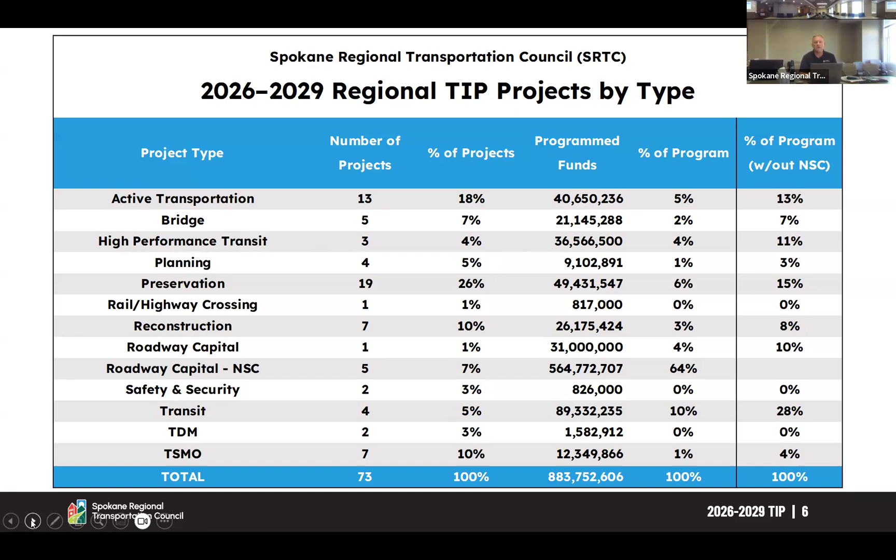We've developed several ways of getting information out to the public, and one of them is through an interactive online map that is linked in the information sent out to the public and to our member agencies, and is available on our TIP webpage.

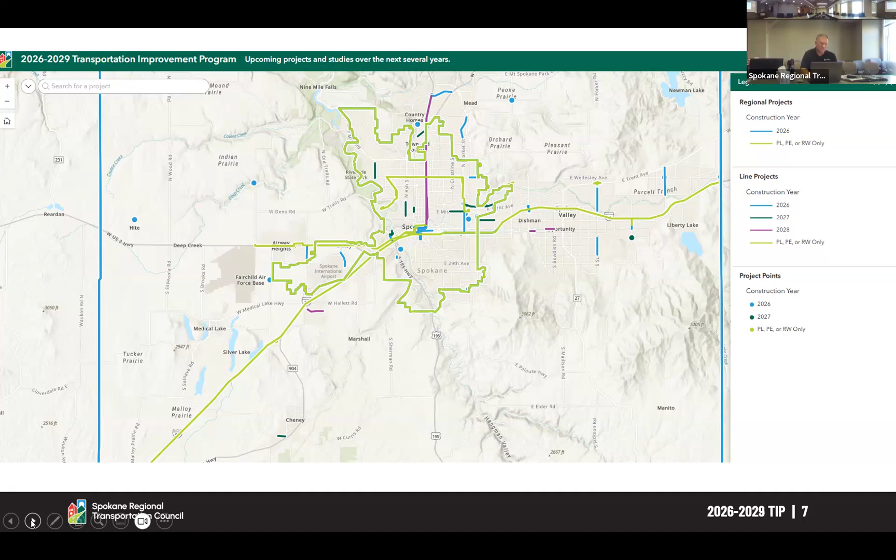I mentioned public involvement being a critical aspect of the development of our TIP, all year round. We are in the midst of a public comment period for this draft 26 through 29 TIP. That runs through October 2nd. Obviously, we're here today hosting our public meeting in a hybrid format.

All public comments that are received throughout the entire process are provided to our committees and to our board before any action is taken on approving the 26 through 29 TIP.

Remaining steps after our public meeting this evening: we'll be going to our committees, the Transportation Advisory Committee and Transportation Technical Committee tomorrow, seeking a recommendation from those committees to the board for approval of this new TIP. The board at their October 9th meeting will consider that recommendation.

Once approved by the SRTC board, the TIP is submitted to Washington State Department of Transportation for inclusion in the statewide transportation improvement program. Once that is incorporated and all the federal approvals are in place, the new 26 to 29 TIP will be in effect in January of 2026.

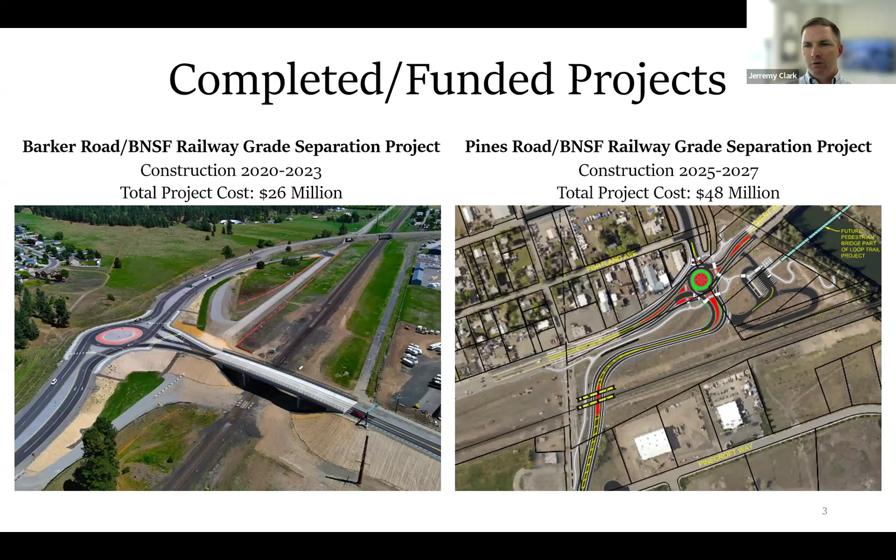As a reminder to those listening, Pines Road will be closed Sunday all day and half day Monday while the railroad builds their first bridge. So that's a project that's ongoing right now. It'll be done in a year or two, depending on how next construction season goes and how much they get done this winter.

Projects coming up, priorities for the city on our federal agenda: the Sullivan and Trent interchange. This is an existing grade separation of the railroad and Trent Avenue that's failing, exacerbated by the connection of Bigelow Gulch. Great connection, but the 2-lane or 4-lane bridge, 2 in each direction over Trent, just can't handle those volumes. So we're working with the consultant right now to get the preferred alternative.

Another priority is the Argonne Road Bridge. This is a choke point along Argonne Road, a regionally significant roadway. It comes in 3 lanes north of the interchange, 3 lanes south of the interchange, and 2 lanes over the interstate. So that is a planned replacement of the bridge to add a 3rd lane. Ongoing right now, just started 30% design on that piece.

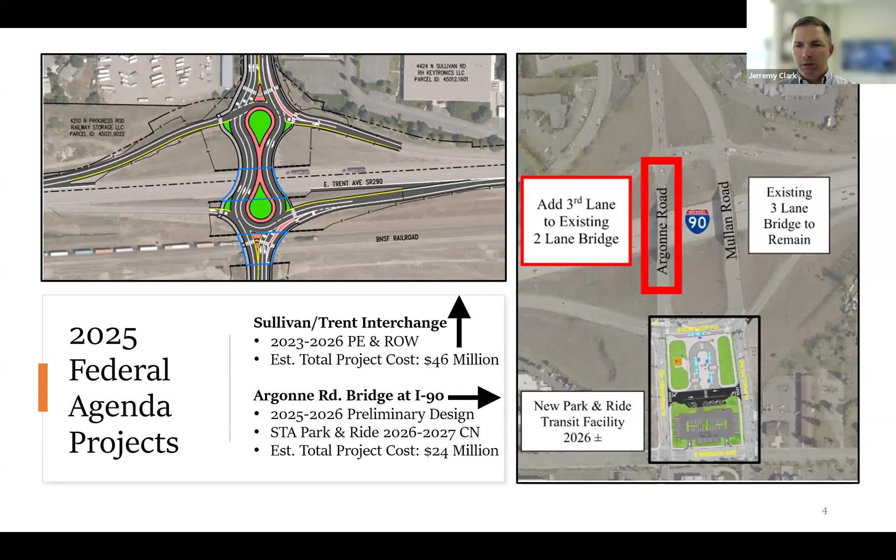It's also connecting to the south to STA's new park and ride facility, which I believe that date might have pushed out to '27 or '28.

Barker Road is and will continue to be a priority for the city, just based on where the available land is for development, how much it goes in each direction, both Spokane Valley and Liberty Lake and the county. And one of the priorities is the I-90 interchange.

Elsewhere along Barker, we have the whole corridor. From Mission to the south city limits, it just continues to see growth. So we have separate projects that are identified. One of them is starting this year, just out to bid or about to be out to bid, and that is the Barker from Appleway to Sprague segment. That transitions from 5 lanes to 3 lanes.

We also have the Appleway to I-90 segment, the Mission to I-90 segment, and then the segment between Sprague and 8th, which includes 2 segments of roadway and 2 roundabouts, one down at 8th Avenue and one at 4th Avenue.

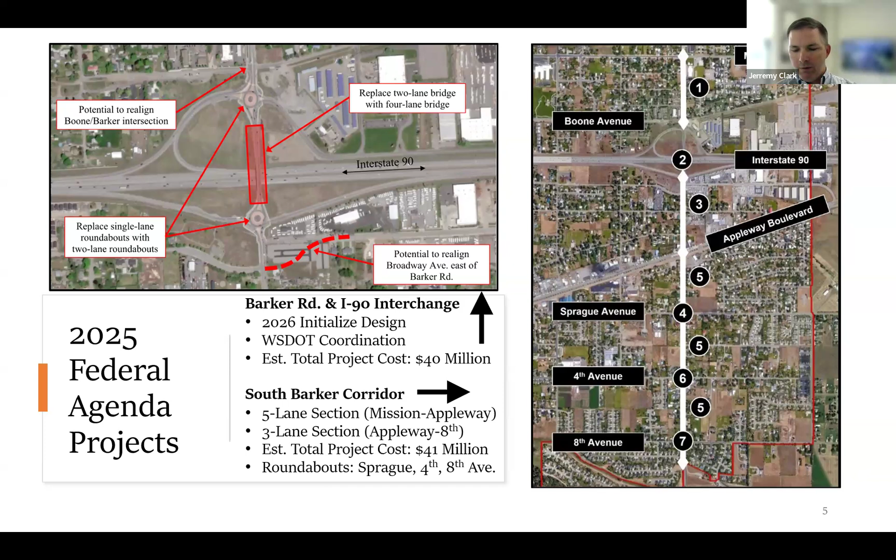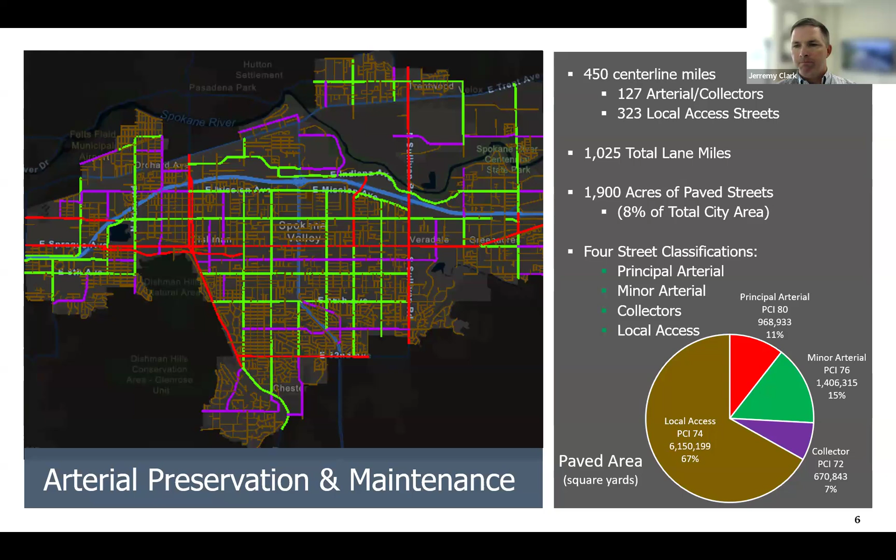So I believe that is it for our list of projects. Happy to have your discussion or answer any questions.

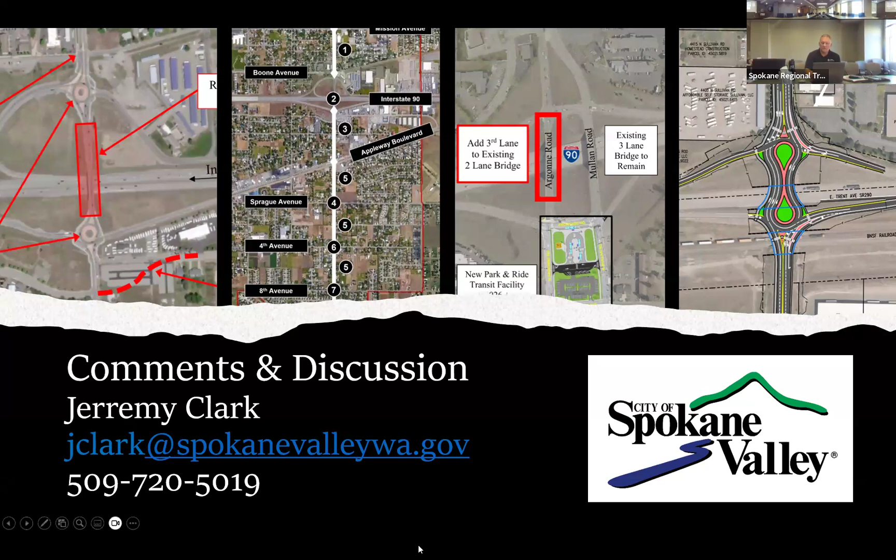Thank you, Jerremy. I don't see any hands raised or anything in the chat this time. So if we do receive some questions or comments later, Jerremy, I'll definitely follow up with you. Very good. Thank you. Thanks, Ryan.

So we can go ahead and move on to Spokane Transit, and Nick, you have some information to share with the public. Yeah, thanks, Ryan.

As mentioned, we've got a slate of projects in the TIP, the majority of which are focused on preventative maintenance and fixed route bus purchases. We also have a project for Section 5310, an FTA grant program that provides funding to organizations to address transportation gaps and enhance mobility for seniors and folks with disabilities in the region. The 2 projects we have highlighted are Division BRT, which hopefully everyone's heard about at this point, and Argonne Station Park and Ride.

For Division, we're in the project development phase, looking for construction starting around 2028. And then Argonne Station, we are in the design phase as well, moving towards getting that under construction in 2027. So we wanted to do a deep dive into that project, as it is the most near-term thing that we will be working on.

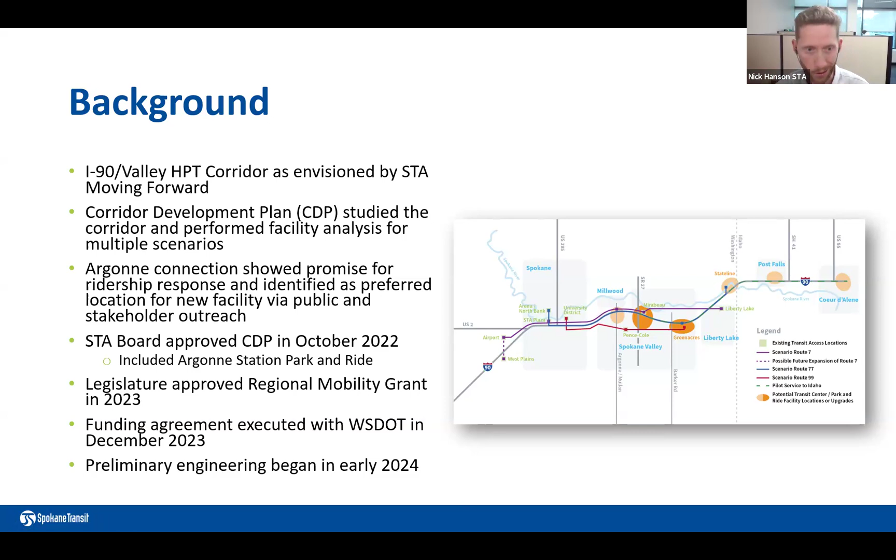Purpose and need of this project: the big one is advancing transportation equity by improving access on the region's busiest corridor. In doing so, we're supporting efforts to increase effective capacity of I-90 as population continues to grow, and helping improve mobility in Spokane Valley and Millwood.

As Jeremy talked about, we'll be integrating with the future Argonne Road overpass and associated improvements. This also provides a direct connection to the airport and Liberty Lake via our new Route 7, which just went into service, and then enables further network improvements in the valley and provides better connectivity to and from existing transit centers and a connection to the city line.

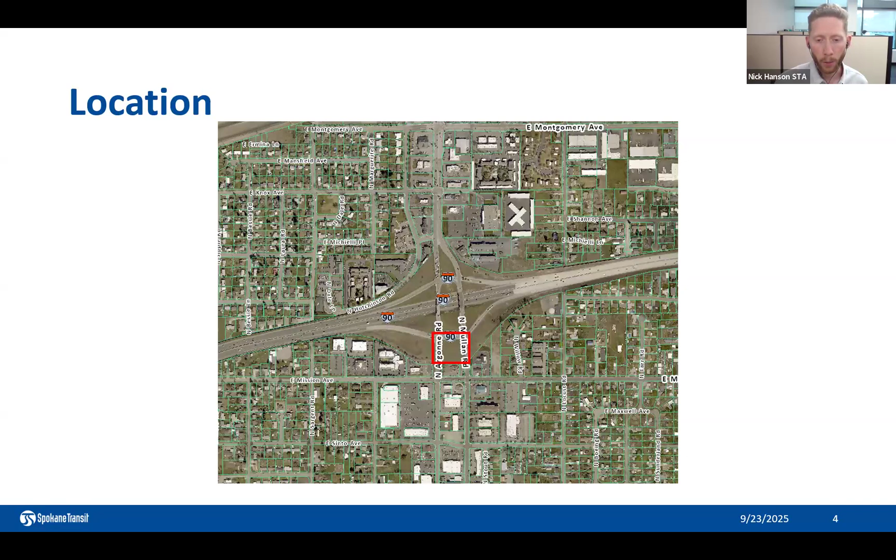Location here is just south of the I-90 Argonne Mullan interchange, north of Mission Road or Mission Avenue. Stakeholders include WSDOT, City of Spokane Valley, City of Millwood, and FHWA.

We'll have a transit priority lane at the eastbound on-ramp. We'll include operator support facilities, maintenance facilities, electric vehicle charging, and we're future-proofing for battery electric bus charging. We'll have bike lockers and other pedestrian and bike improvements, and passenger information in the way of digital signage, real-time signage, and things of that nature.

In the image here, this is a little hard to see, but this is Mission Avenue. This is a private parcel. Folks are familiar with the area, the Casa de Oro Mexican restaurant. Freeway is just to the north, and this is the off-ramp and the eastbound on-ramp.

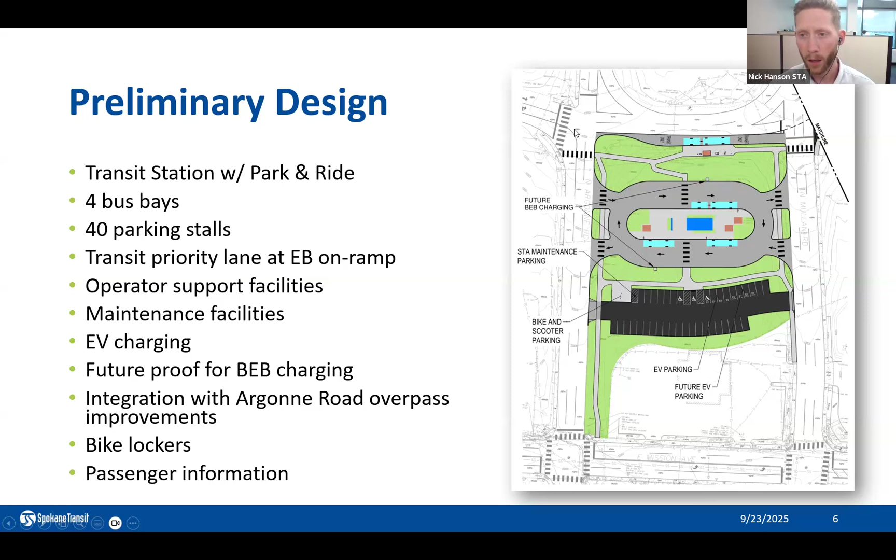Here are some graphical representations of what the facility will look like at this point: passenger waiting areas in the form of our standard bus stop shelters, our maintenance and facility and operator break room building, a bit of a breezeway there for some customer information, a touch of landscaping, and then the park and ride to the south.

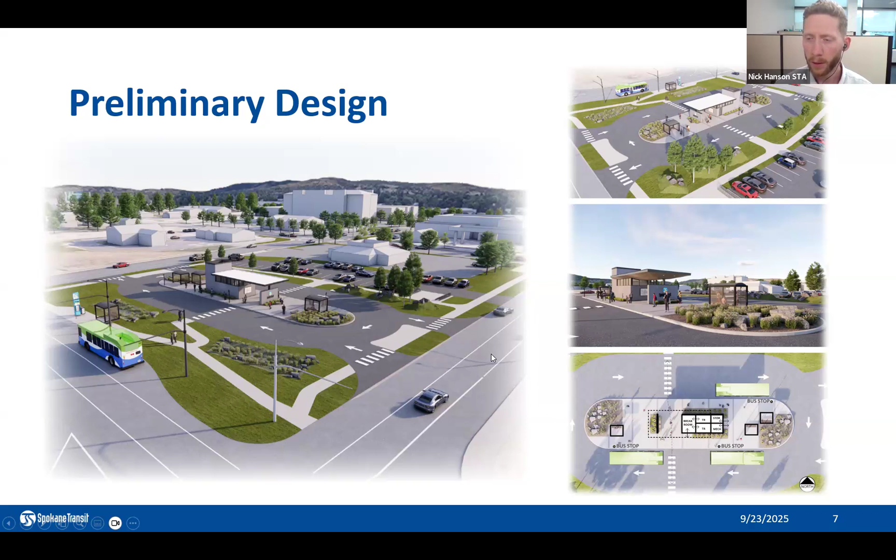So our funding program: 1.2 million of CMAQ funds, the regional mobility grant I talked about at $10.4 million, and local funds in the amount of $1.4 million, for a total project budget of $13 million. Our current estimate is just around $10 million based on the 30% design.

Public outreach summary: we've had a couple open houses related to the planning efforts for the project, and then a 30% design open house that we completed in June. We plan for a couple more events once we get close to final design, and then just before construction, hopefully in fall 2026.

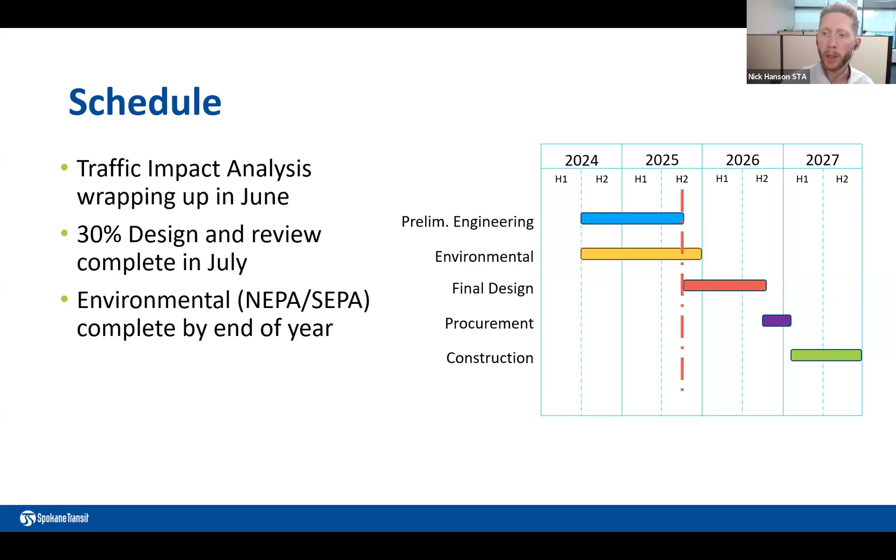Schedule: at this point we are starting our 60% design. We should be wrapping up our environmental here in the next month, along with the traffic impact analysis. And then again, targeting advertising a contract in late 2026 and starting construction in early 2027, with the plan to be operationally complete by the end of 2027.

Any questions about Argonne Station?

I'm not seeing any currently, Nick.

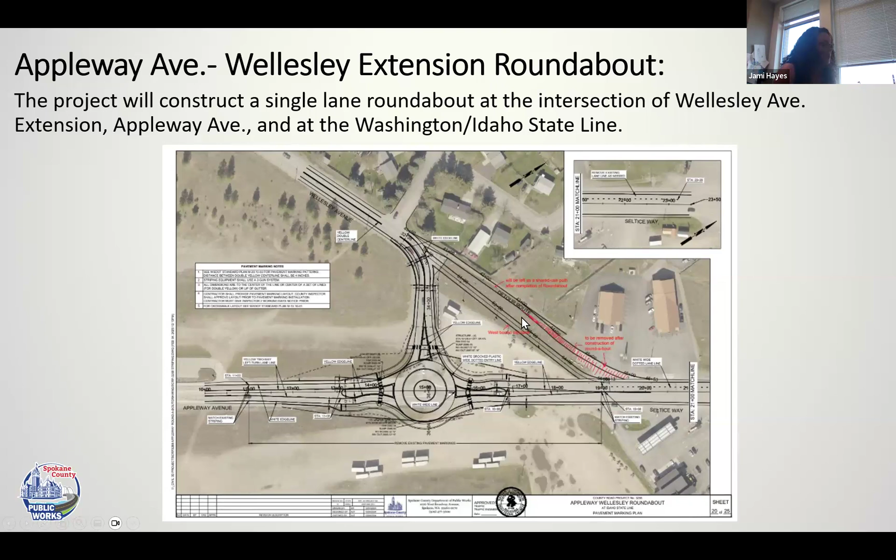Everything to my right is in Idaho, and everything to the left is in Washington State and Spokane County. Both Wellesley Avenue and Appleway are arterials exceeding 11,000 daily traffic trips every day, with Appleway inching close to 16,000 traffic trips every day.

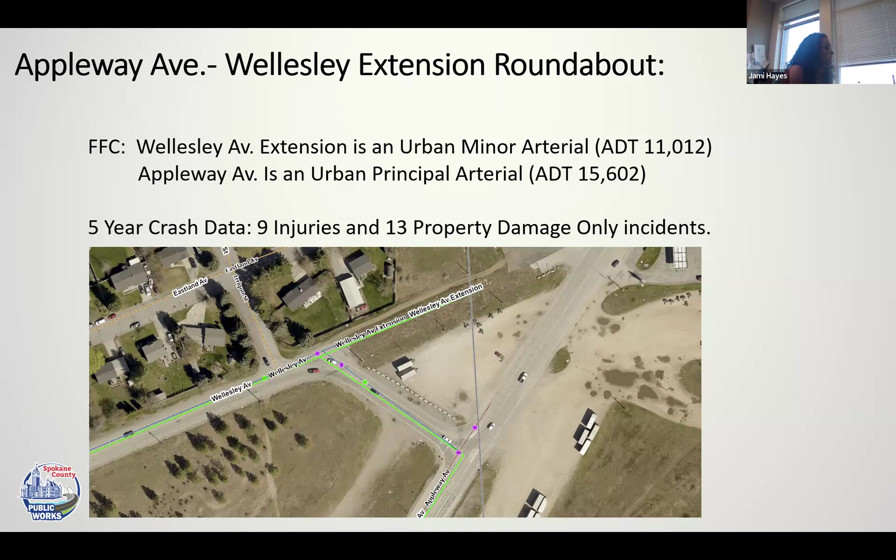I pulled our last 5-year crash data for the project. This is new crash data, not what we applied with. You can see there were 9 injury accidents and 13 property damage or PDO incidents here. We collaborated with the Post Falls Highway District on this, and their crash data, I don't have current data, but it was also pretty high, I believe 7 or 8 PDO accidents and a few injury accidents. So we're inching close to 20 property damage accidents in the general area and double-digit injury accidents here. Once we found this out, we decided that we needed to do something about it.

So we applied for county safety program funding through WSDOT, but this is a federally funded project through HSIP, the Highway Safety Improvement Program. The Post Falls Highway District contributed 10% to the project. We were awarded almost $1.3 million, and then we provided the remaining funding needed to get this project going. The project total is just about $1.7 million altogether.

We should be wrapping up the design soon this year, acquiring any right-of-way needed by late winter or early spring, and starting construction in spring of 2026. This project should be open to the public in about a year from now.

Some of the project highlights for this roundabout: this is a really fast growing area. If anyone's familiar with what Kootenai County has done, our neighboring county in Idaho, over the last 10 years they've seen some really unprecedented growth, meaning a lot of people traveling back and forth. With that growth there's a lot of development: a giant Post Falls RV campground area, a Cabela's, restaurants over here. To the north of the project is a residential community in Spokane County, and to the south is the Centennial Trail and I-90.

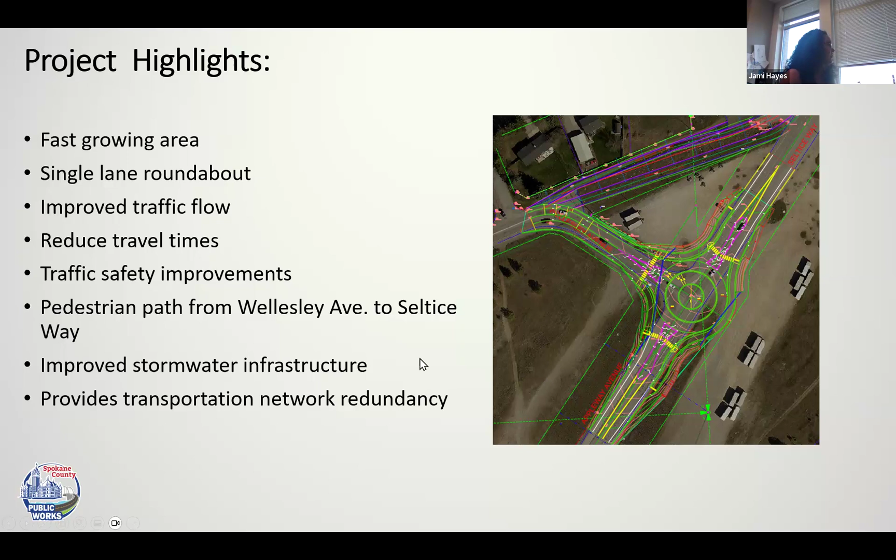I just wanted to show you a little bit more context. You can see right here, way out on the state line, existing conditions, and some of the developments. There's a huge Walmart over here, just a lot of things going on both sides of the state line. Hopefully this will help.

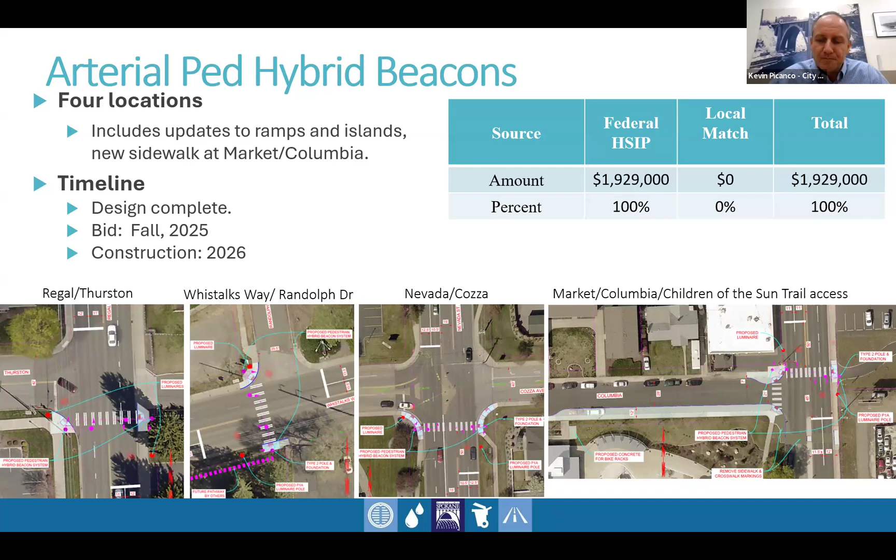Second project here is our Fish Lake Trail to Centennial Trail Connection project. It's really a series of phases of projects, and we'll focus on the phase 1 project here. The funding table to the upper right shows the funding for phase 1. The map to the right, with the boxes labeled TR2 and TR3, highlights the first phase of the work.

Not included on this screen, there's a separate portion of the project over on Thorpe Road off of 195 for the Fish Lake Trail. If you're familiar with the trail in that area, it's elevated on a former railroad embankment, a good 20 plus feet off the ground. This project will install a ramp down from that embankment trail down to Thorpe Road, providing access up and along Thorpe Road in both directions.

So this first phase runs from the Lindeke Trail to 5th Avenue and Government Way. The second phase of the project, which we were recently awarded grant funding for through SRTC, will continue from 5th Avenue and Government Way, winding down the hill. You can see all the switchbacks it takes to wind down the hill, then across heading towards Sandifur Bridge to provide the connection to the Centennial Trail.

In phase 1, we're in the midst of design. Right-of-way acquisition is starting, very minor, some corner takes at properties for ADA ramps. Should be heading out to bid early 2026 and constructed in '26. For phase 2, with that recently secured grant funding, we already had some prior dollars awarded for the design phase, and the recent grant funded the construction. That'll allow us to continue design through 25 and 26, heading towards construction in 2027 and 2028.

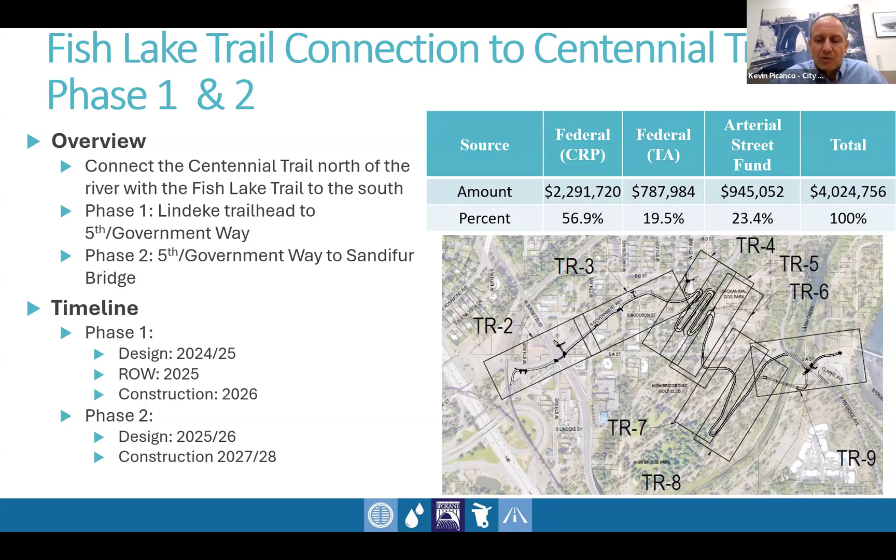Next project is the Millwood Trail project. This has been in our program for a while. It was funded through a variety of sources, a little bit through SRTC, and a large chunk through the state's Move Ahead Washington program, about $5.8 million. It's a trail that runs along the south side of the river from roughly just east of Green Street near SCC, running along the river.

As it approaches Felts Field, it deviates from the river along that red alignment shown there, then heads over along Rudder Avenue. We're in the midst of environmental work on this, given the proximity to the river—there's a lot of environmental hoops to jump through for clearance. Also getting ready to start right-of-way acquisition. That design will continue through 2026. We're looking to put it out to bid by the end of '26 for 2027 construction.

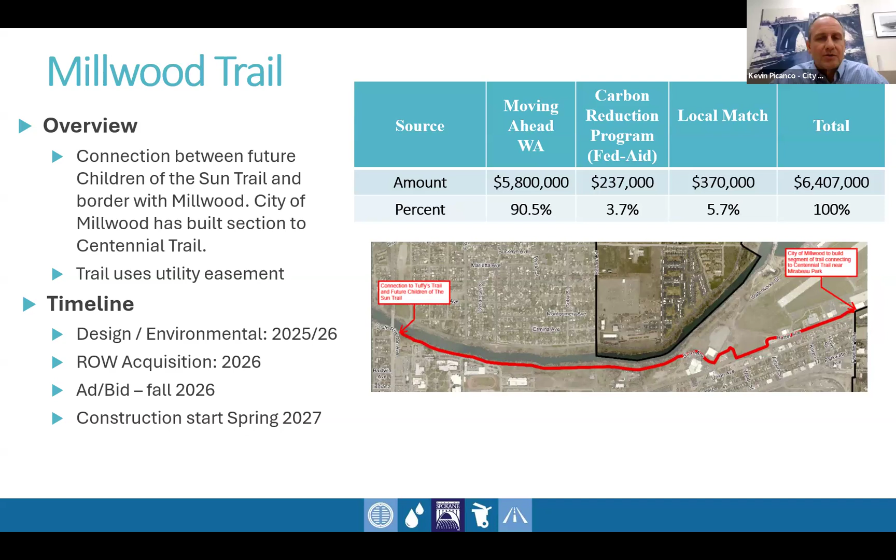Next project is the Freya Palouse roundabout project. This project is really interesting given the unique geometry of the intersection and the unique roundabout we're planning to construct. Some folks are calling it a 'peanut-about,' given its unique shape. It will also be a 5-legged roundabout. Today it's 4 legs, but there's a 5th street, 51st Avenue, very close by, that'll be incorporated into the overall geometry and alignment.

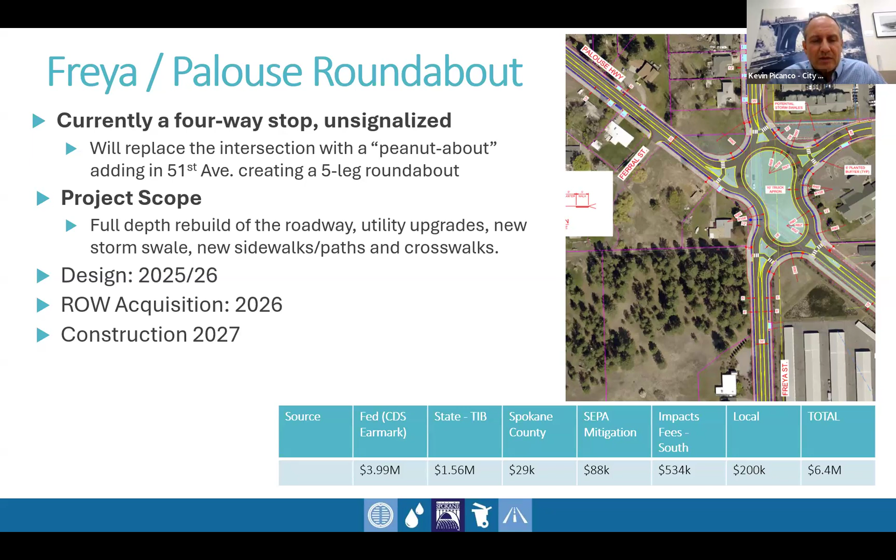The funding table at the bottom is worth noting—it highlights the challenge of putting together some of these projects to get them fully funded. In this case, 6 different funding sources contribute to that total project cost of a little over $6 million. Design is just getting underway and will continue through '26, with some right-of-way acquisition in '26 and plans for '27 construction.

Latah Bridge is another project we just received grant funding for, which we're grateful for, for the design phase through SRTC. We'll be putting out an RFQ to hire a design consultant for the bridge design in early 2026. This bridge is really vital to the region—it's really the only viable east-west alternative route to I-90. In case of emergency incidents on I-90 or need for closures, this is really the only critical, viable route, Sunset Highway or Sunset Boulevard, that traverses across the Latah Bridge.

The total project cost for this is $65 million. So the real focus of this initial design is to tee us up and put us in a better position to pursue the grant dollars needed to fund the construction phase of the project. This first design effort will take us through 60% design and completion of the NEPA and environmental approval.

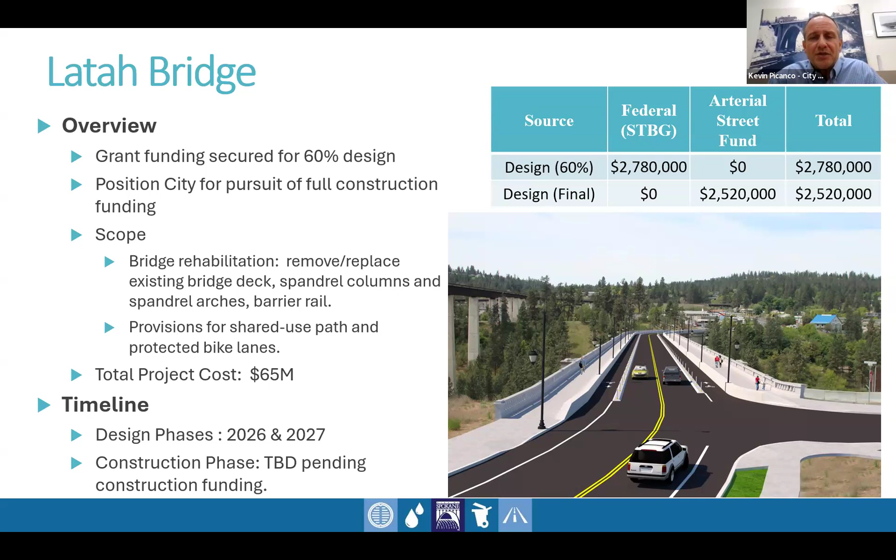Next project is the Division BRT Active Transportation Project, also recently funded through SRTC's call for projects. These are 4 different projects identified through the Division Connects study, focused on active transportation components along the Division BRT corridor to improve bike and pedestrian access to the transit facility. This suite includes 4 primarily east-west routes on Central Avenue, Everett, Longfellow Avenue, and Sharp to the south, with a mix of improvements from protected bike lanes to multiple RRFB ped crossings and pedestrian crossing enhancements.

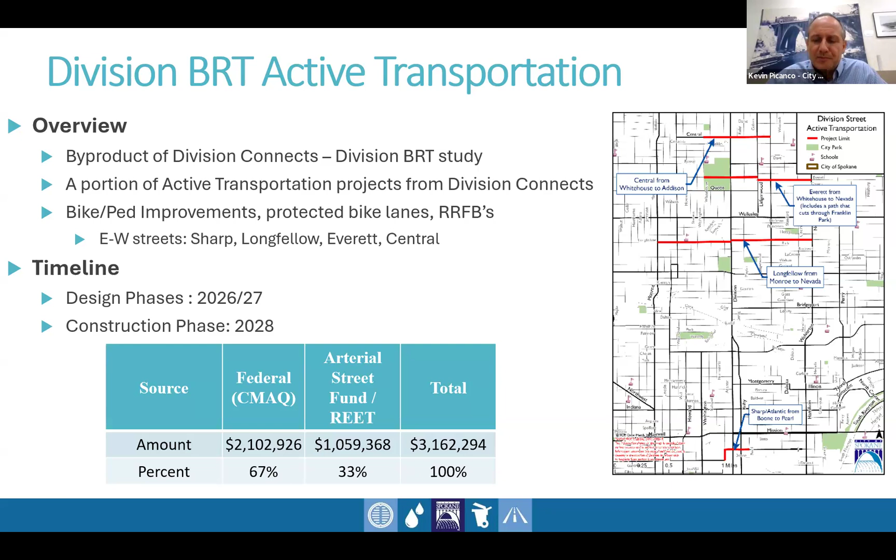The final project I want to highlight was another recent grant award through the Safe Routes to School program, federal money in this particular Safe Routes grant. This project will install protected bike lanes along Assembly Street and a new traffic signal at the Assembly Wellesley intersection, just adjacent to the new Flett Middle School that opened a couple years ago. You can see where my cursor is, just to the northwest of that Assembly Wellesley intersection.

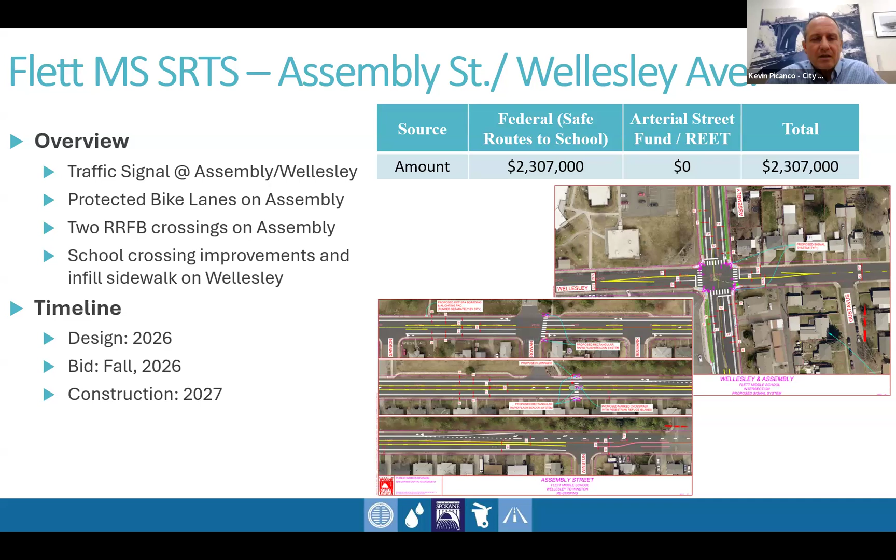These grants have a pretty quick turnaround time in terms of their expected delivery timeframe. We just received notice of award over the summer, June-July timeframe. We're already launching into the planning effort for the project, moving into design in '26, bid it by the end of '26 for construction in 2027.

So that's all of the projects I'm highlighting today. Happy to take any questions.

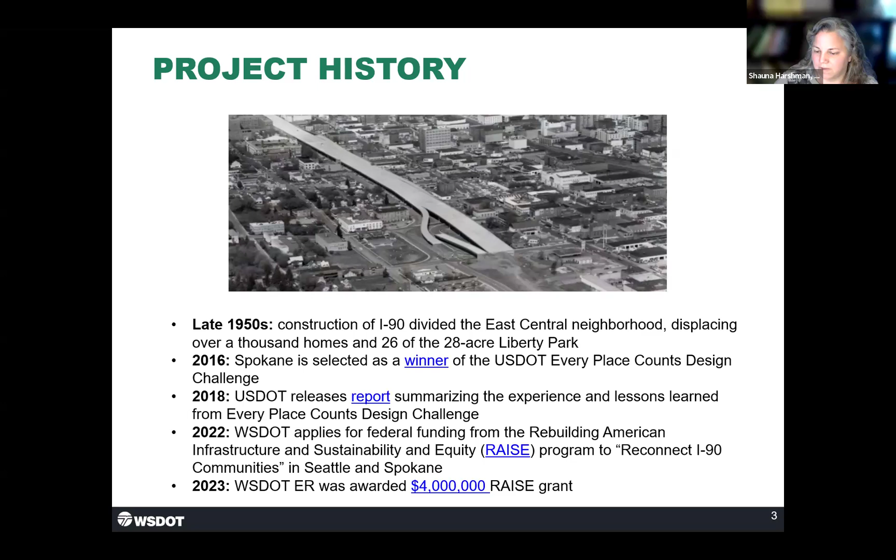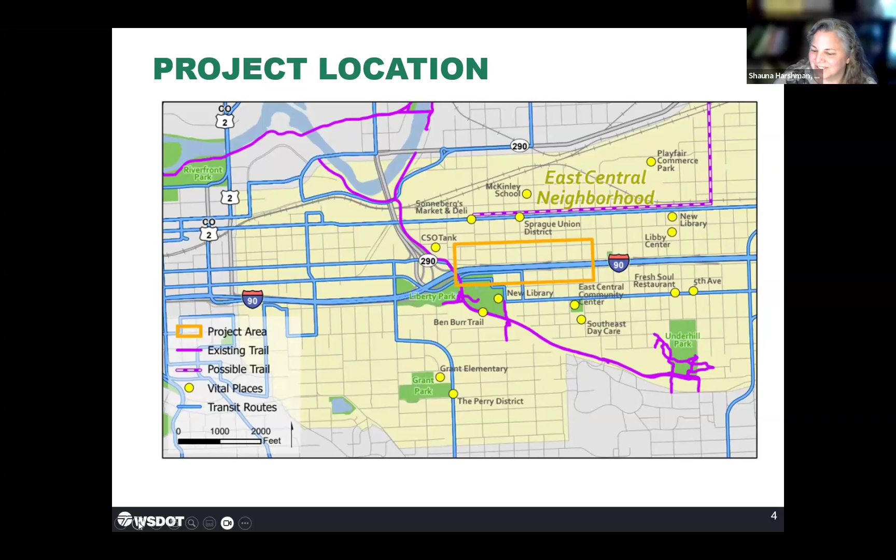So what we're thinking is the project location will be the area along Interstate 90 adjacent to Liberty Park. During scoping and early conversations, we've been asked a number of questions about the old Liberty Park ruins and spaces underneath the Hamilton interchange. There seems to be a lot of interest from agency partners within our own agency and from the community so far to understand if there's any ability to leverage future improvements in this project area outside the scope of the land bridge. So we're aware those are interests, and we'll see what the scope of the project will allow.

So the design and footprint of the NSC, when that was scaled back several years ago, left that vacant swath that we now refer to as lease lands, or potential NSC lease lands. From lands we acquired for the larger roadway, with the implementation of practical solutions and the reduction in that footprint, it did leave us with some available right-of-way in this area that has some interesting potential for a land bridge.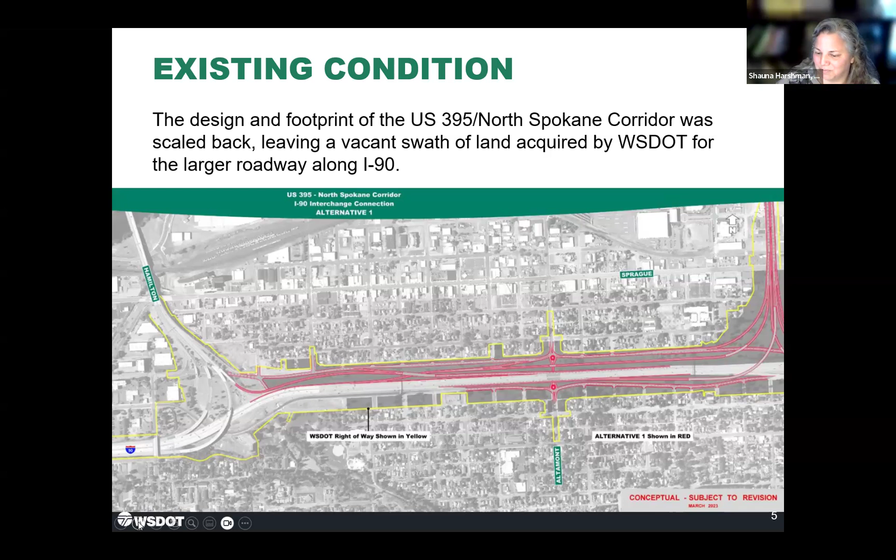So why a land bridge in this neighborhood? We have hopes of positive impact in a few different areas. It is intended to improve safety by reducing or eliminating the frequency of conflicts between drivers and other road users. We also hope to reduce vehicle miles traveled with increased volumes of active transportation.

We'll connect with the Ben Burr Trail and the Regional Trail Network, Children of the Sun Trail, and Centennial Trail, over on the west end of the project near Liberty Park and Perry Street. This will also help with shielding the neighborhood from traffic noise and vehicle emissions. Since concept development began, even in the past year and a half, there's been increased development interest in that Perry neighborhood, so this should help shield some of that traffic noise, as well as promote economic mobility and equity for vulnerable populations that reside in this project area.

There may also be some opportunity, especially along Second and Liberty, near that park, to provide more convenient access to bus stops, perhaps eliminating some transfers and improving transit connections.

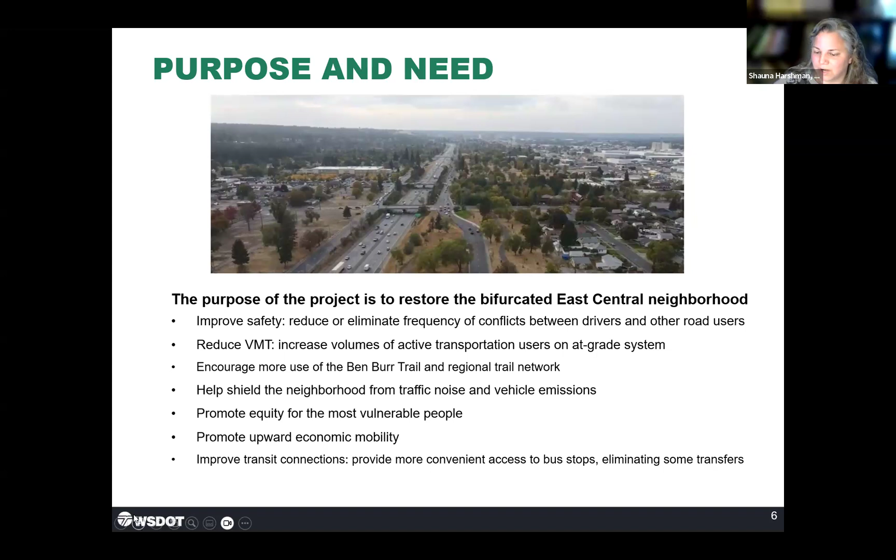So our design parameters currently are that this will be a grade-separated active transportation land bridge near Liberty Park, connecting to the Ben Burr Trail and the Children of the Sun Trail. It is designed around zero carbon modes, with special emphasis on pedestrian scale lighting and crime prevention through environmental design, with the intent to increase and expand that park-like environment that was lost to freeway construction.

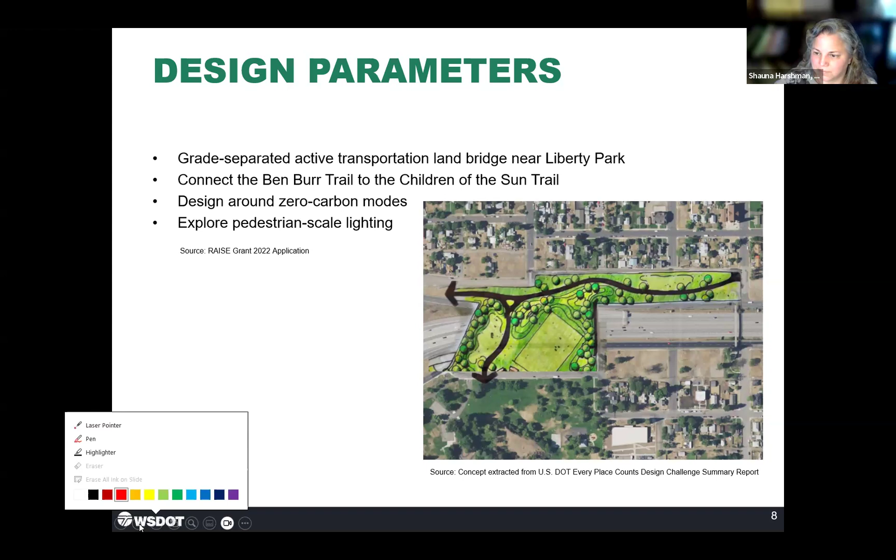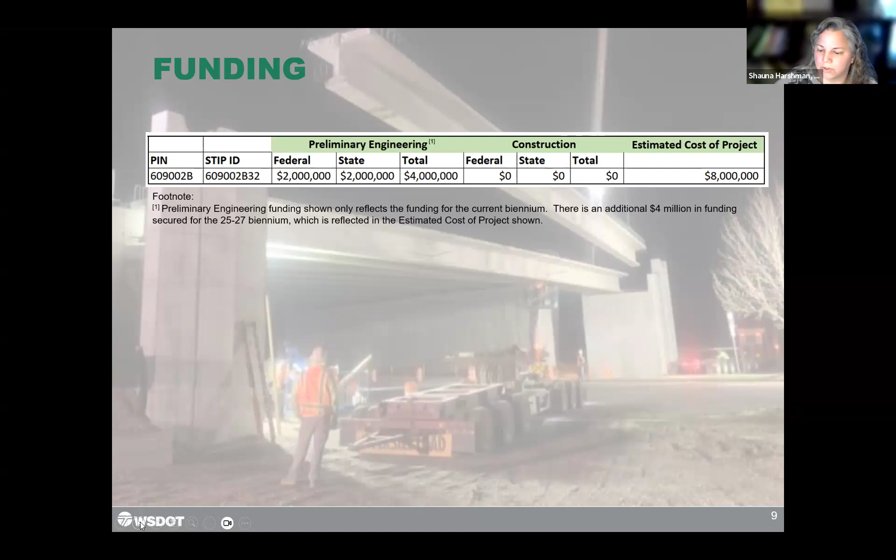I've already talked about the funding a little bit, but we had $4 million essentially in federal funding and $4 million in state funding. That's broken out here by biennium, which is why you're seeing 2 million and 2 million for the current 23 to 25 biennium.

Phase 1 is planning and pre-design, which will get us to our 30% design concept, where we'll have our preferred alignment and designs, and that is scheduled to take about the next 18 months. Then we'll have 12 to 18 months for the final design, getting us all the way up to 100% design.

The only caveat that might be of interest is that as we're into that 18-month planning and pre-design phase, once we're at about 15%, we should have dialed in pretty closely what our preferred alignment will be. At that point, we'll start looking for construction dollars, so we don't plan to just do planning and design on this one—we plan to overlap and start looking for the funding.

Just a high-level overview of where we're at and how this project is shaping up.